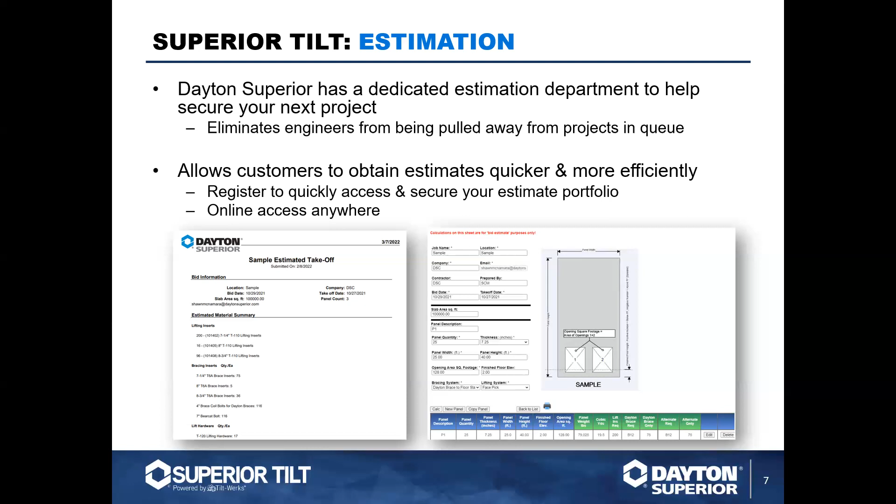But we also have on our website a tilt-up estimating program that you can actually log into and do a quick, more basic quotation for inserts, anchors, braces, lifting hardware, shim packs, bond breaker, etc. Those are actually available at any time. And the nice thing is this system is online, so it's available anywhere.

Engineering. Every project that we run through typically does the pre-engineered design calls with the contractor. These calls can include specifics and/or the requirements of the job, lead times, and where any hiccups may occur to help reduce any RFIs.

Our Superior Tilt team also has 280 years of experience, so they're not a bunch of newbies out there. Our guys have been in this industry quite a while. They understand the tilt market and the industry, and we have in-house professional engineers, 10 of them right now, covering the 50 states.

Lifting and bracing submittals can be completed in AutoCAD. More versatility and options for the customers. What we're looking at is based on what braces may be owned, what lifting hardware or lifting inserts are available, as they could possibly change, because we've all heard about the supply chain issues throughout the years. Dayton Superior works very diligently to reduce any holdups for our tilt-up products and inserts coming in.

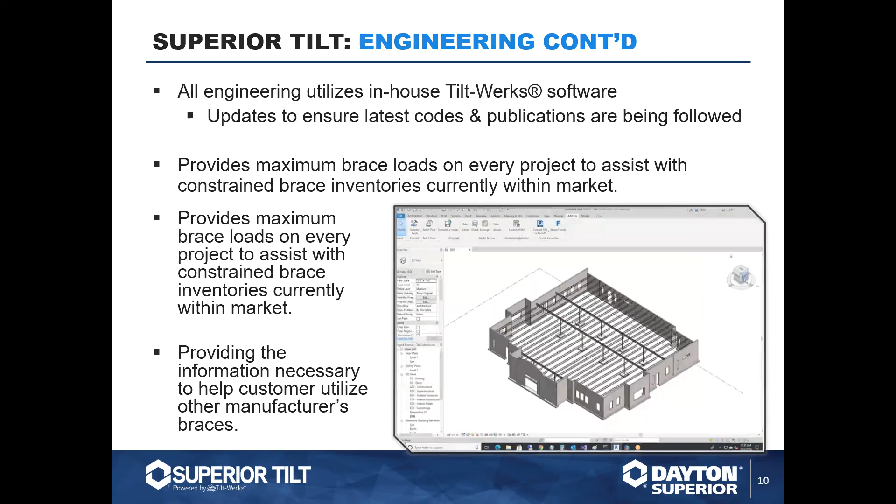Provide the information necessary for the customer to utilize other manufacturers' braces. That is something we can also enter into our database as far as what braces you may have. They may not be Dayton Superior's, they may be a competitor's brace, but their load rating may be a little different than what we claim on our braces. So those have been all the features of TILT-WERKS.

So let's talk about some of the benefits. We talked about every facet of the business, whether you're a design architect, structural engineer, contractor, fabricator, or material provider. TILT-WERKS offers a solution to each and every process here. For the designer, it aids in the design of the package to put a building out for collecting bids. For the structural engineer, it helps with designing the project.

Contractor, estimating. The fabricator, obviously fabricating the rebar package, which we can also put as part of a benefit with TILT-WERKS. And then obviously the material provider providing all that information, all rolled up into one. Increasing efficiency, reducing lead time, reduction of costs, especially if there's a change order that comes through.

Change orders: one of the biggest things I find that this system is remarkable in reducing is the downtime. When a change order comes in, especially if all the parties are using TILT-WERKS, it goes right back to the design engineer or the structural engineer. At that point, they make those changes right there. And as soon as they make those changes, they can come right back to the contractor, you know, within hours, so we can put everything on schedule for everybody.

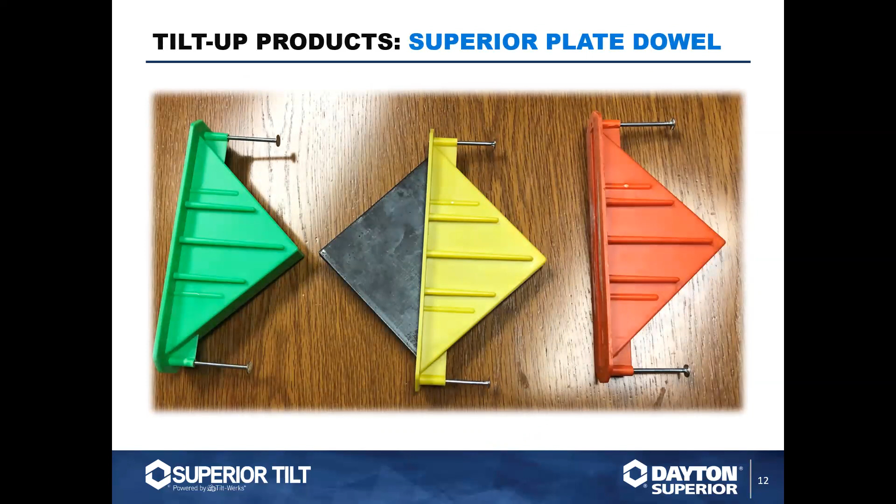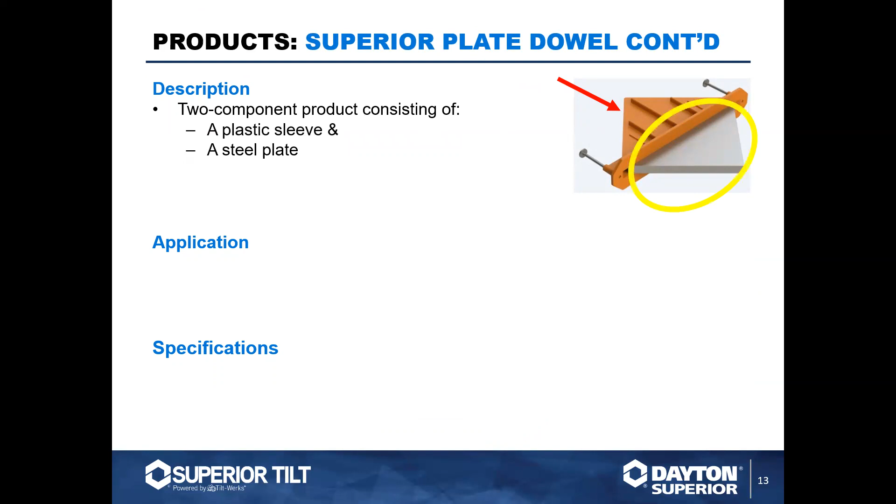Some of the other products that you're going to see that we also offer within Dayton Superior is obviously Superior Plate Dowel. Plate dowel is basically a two-component system consisting of a plastic sleeve and a steel plate. Basically, this is for load transfer devices in concrete joints, to allow concrete slabs to actually transfer the load across the joint from slab to slab.

Typically, we can recommend it for joints up to 0.20 inches wide. It can be used in concrete slabs such as jointed floors, or flat work. Typically, a lot of these dowel plate systems have replaced the smooth round dowels we used to use.

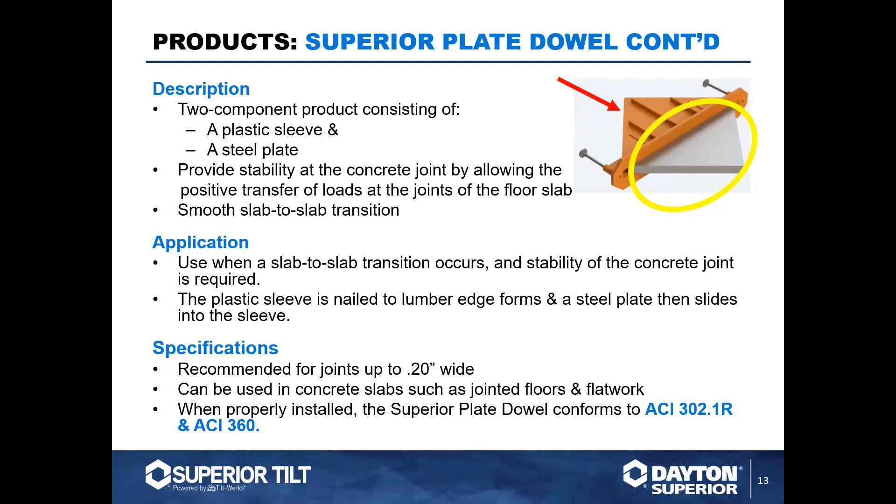And then we also have our SureLift J6L VOC-exempt solvent-based bond breaker, dissipating cure. This is one of the new products coming out, and it uses an exempt solvent material that basically flashes off right as the application occurs. You get an initial flash of that material evaporating off.

Densifier, compatibility with tilt-up. We see more and more floors going with a densified surface treatment. Typically, your PentraHard system is a lithium-based concrete hardener. It can be applied typically right after final finishing. As soon as the bleed water comes off of the slab, you apply the PentraHard. The bleed water comes back up, so the surface re-wets. Once that dries off again, you then apply your cure coat and then bond breaker.

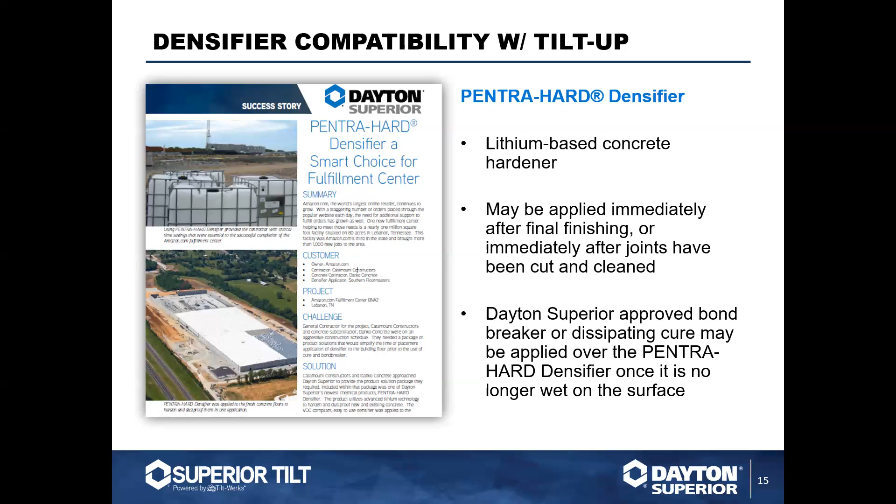Application of the PentraHard basically is with a low pressure sprayer. Typically we see more low pressure sprayers than hand pump sprayers, primarily because of the size of the slabs that we're talking about. If you get pools or puddles of any of the material, you can take a small soft bristle brush and broom it out, or you can use a microfiber pad.

Cure is basically cure per specification. So once the material is actually done bleeding off the surface of the concrete, you would apply your cure or bond breaker as your cure, and then continue on from there with your bond breaker as your bond breaker.

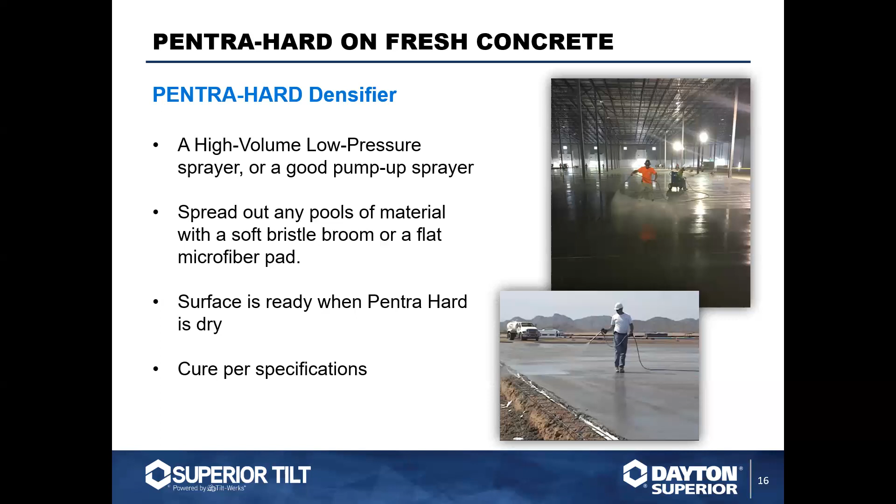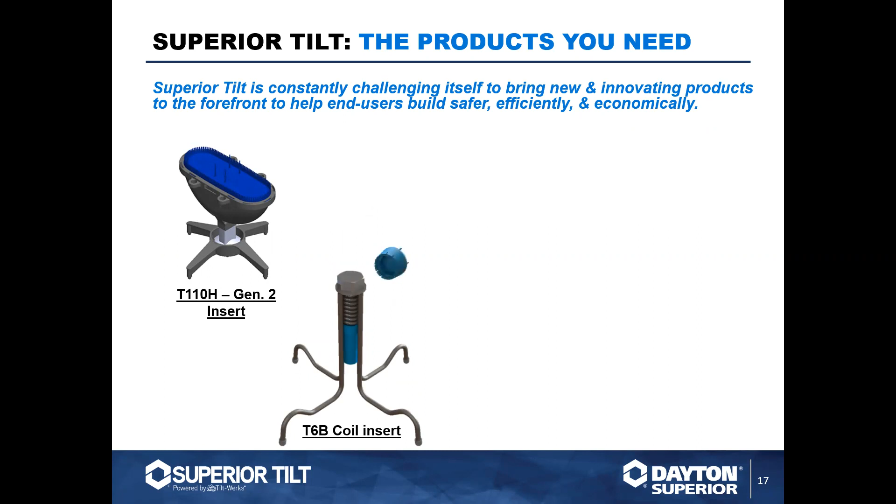Lifting components. For lifting components we have the T110H Generation 2 plastic chairs. In lieu of the steel cage that we used to have, this eliminates the worry about it getting knocked over or having any rust stains on the surface of the concrete. We also have our T6B, which is the all-in-one coil bolt and brace anchor. And then obviously our Bearcat bolts, both single-use and multi-use, for post-applied application.

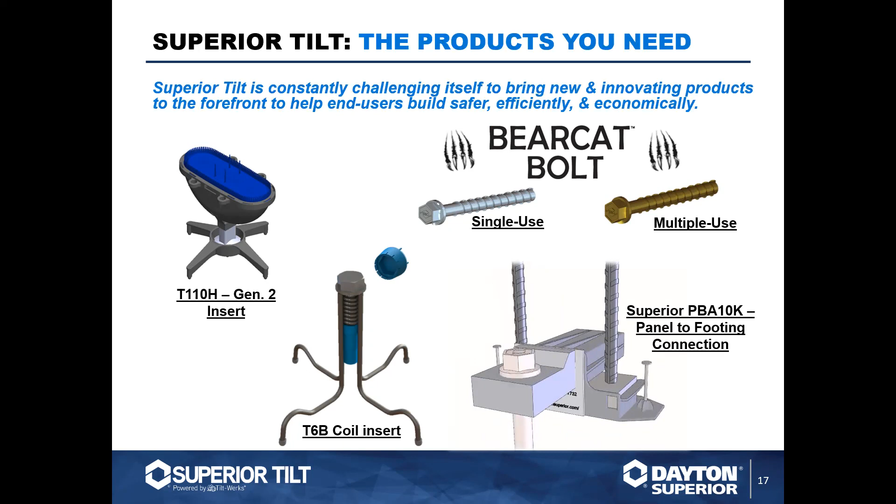We also have our Superior PBA panel base anchor, a 10,000-pound panel anchor to footing connection. Typically that is a specified product within the project.

Bracing. As the market progresses, we're seeing more and more contractors and dealers own their own braces. So we can brace using TILT-WERKS. Putting that information in TILT-WERKS at the beginning will then calculate using what braces you have available, whether it be the contractor or the distributor. The cast-in-place or post-installed anchors, and whether you're going to be bracing to a deadman, the slab, a helical ground anchor, etc., can also be put into that.

Panels braced inside or outside of the project. Typically, projects braced to the inside will have bracing to the floor slab. Outside is typically going to be done with a helical ground anchor or deadman.

And we're going to brace for maximum wind speed bracing based on location. Dayton Superior was an integral part in revising TCA's version 18.1 of the wind guidelines, which went into effect about 5 years ago.

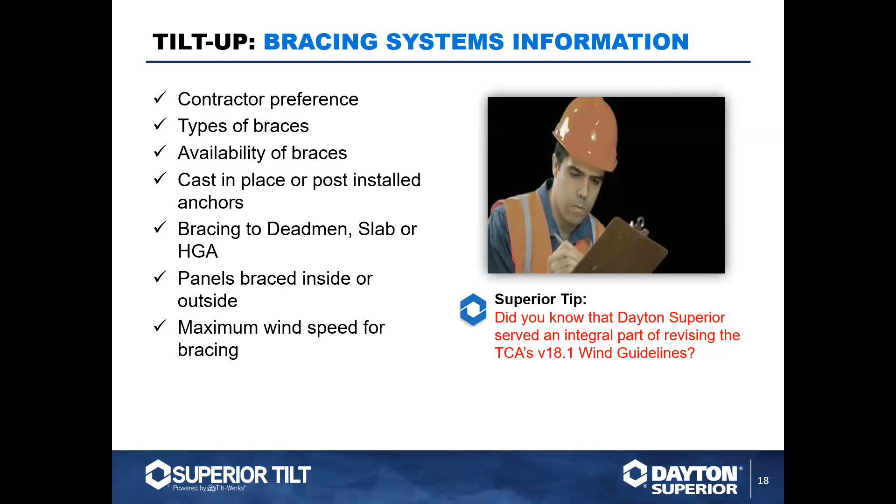Braces that are available. Let me take that back a second there, get a little happy with my finger.

And one of the things too you're going to see is that Dayton Superior is also in the process of renaming all of their braces so that the name is actually relevant to the size. We have helical ground anchors and extensions available with installation available.

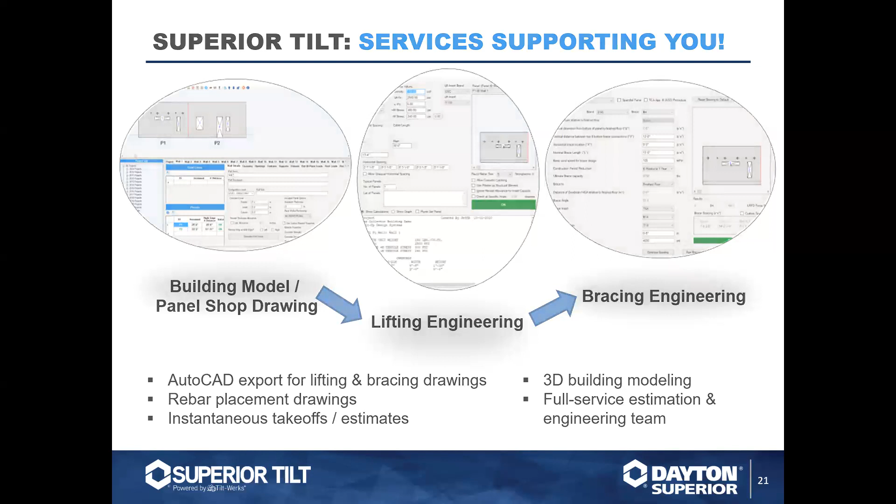Design software, total package, from engineering all the way up to installation of inserts, anchors, helical ground anchors, etc. Incorporates all dimensional products, engineering elements for a complete project, including rebar takeoffs, reveals, etc. All can be done through TILT-WERKS. Shortens building time frame. This will actually accelerate all of the products here with rebar drawings, placement, shop drawings, and lifting and bracing engineering.

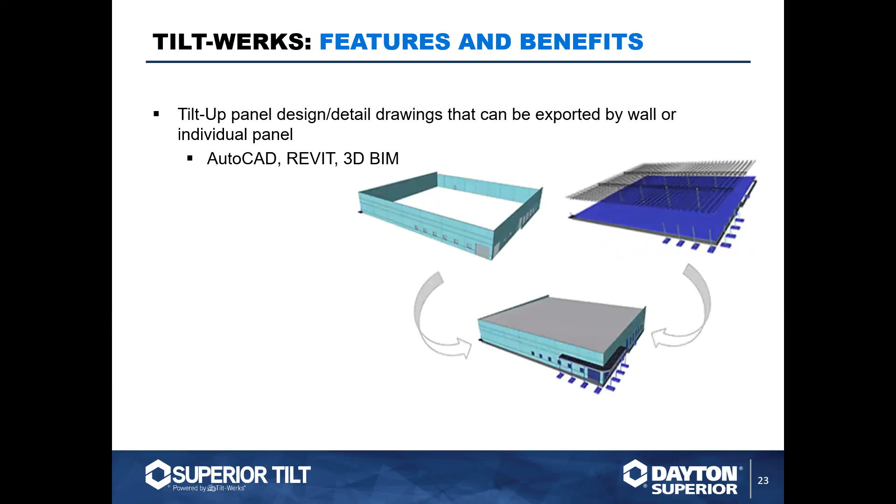Features and benefits. Available in CAD, Revit, and BIM. Full material quantity summary project estimates can be used to help define costs for full customization. 3D modeling and paper doll capabilities. Quickly generate a 3D model for the general contractor, architect, or a building owner.

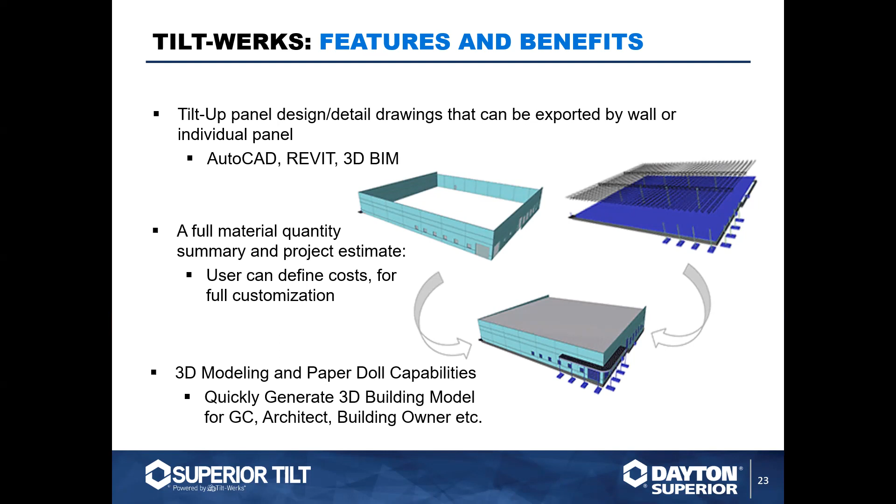Training opportunities. We have our 101 training, which is about a 1 to 2 hour long class session. Typically can be done virtually or in person. Typically covers sales support, engineering, braces, rental, all of the AccuBrace, and any dedicated tilt-up customer service team questions that may come up. We can also include a hands-on brace and lifting clutch inspection process. A lot of times you're seeing this as a refresher for a lot of companies going through it.

Our 201 training program is held in person or virtually. Typically, this is a full day training. It's in-person, from nuts to bolts. It covers everything from the beginning, from tilt-up design, all the way through to installing the packages and any coatings and painting of the panels. Like I said, we typically do this one in person. We have been doing some virtually. This is also required to purchase materials for tilt-up, as we only certify self-certified tilt-up or authorized tilt-up distributors.